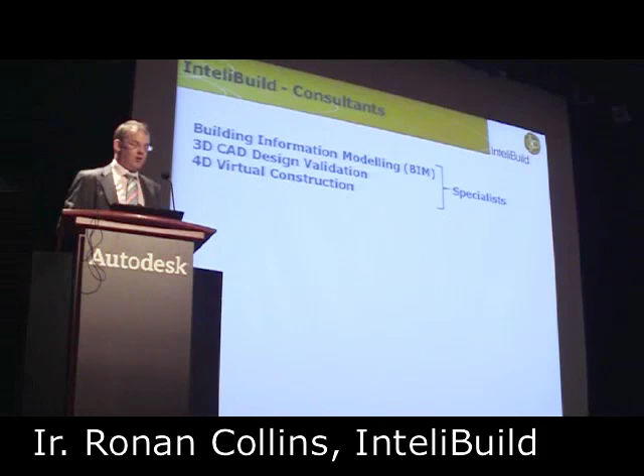My name is Ronan. I'm a chartered structural engineer and I'm the managing director of InteliBuild, and we're a specialised BIM consultancy business. We focus purely on BIM, 3D CAD and 4D virtual construction.

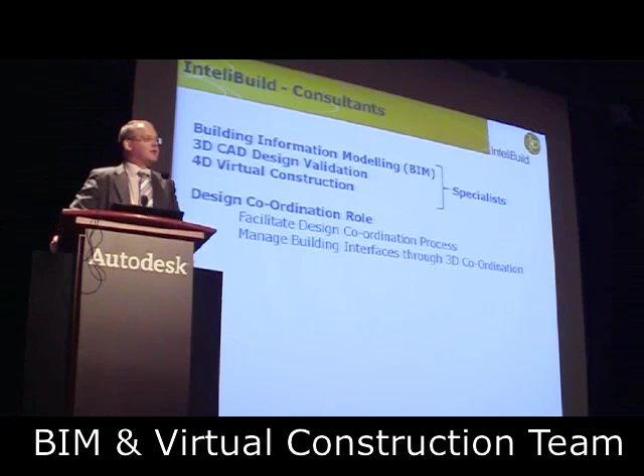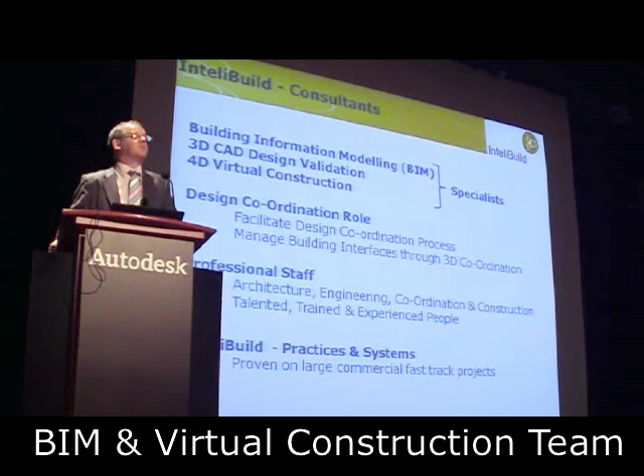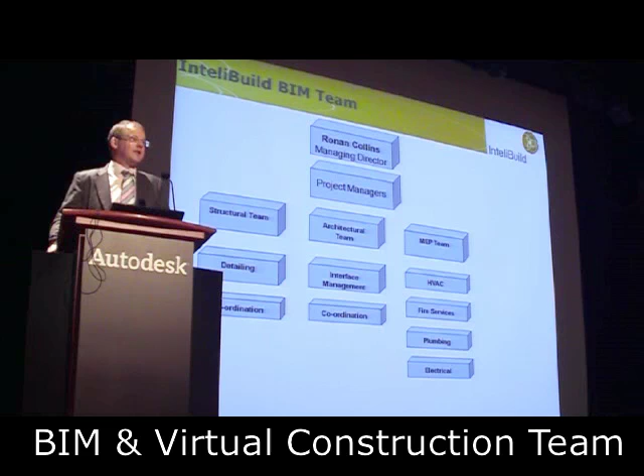We have systems and processes that we've developed over the last 6 years to do design coordination, facilitate coordination and facilitate construction planning. In our office we employ architects, structural engineers, MEP coordination staff and construction planners. We have set up project teams with structural engineers to do detailing coordination, architectural teams to manage interface management, and we have an MEP team who look after all the different disciplines. Each of the teams have specific skills and specific disciplines and are led by a project manager experienced in coordination.

So what I'm going to do today is talk about two different strategies for implementing BIM, both of which are evidenced in Hong Kong. One is a client-led design BIM process, and one is a contractor-led BIM process. If you're dealing with a large construction project and a large multidisciplinary team, there is an option to do full BIM by a full design team. And what we mean by full BIM is an architectural 3D model, structural 3D model, and MEP 3D models, all from the outset of the project.

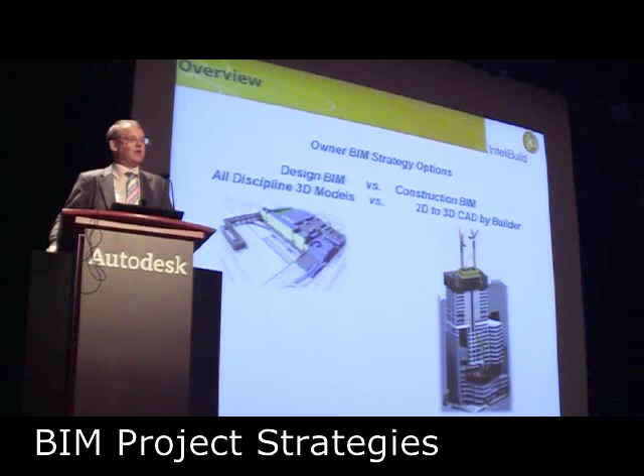On Cathay, the objectives were very clear at the outset. We had a very clear goal: to save time during the design process and the construction stage, to produce a coordinated, fully detailed design clash-free, to use the technology to produce all of the construction documentation, and to reduce the client's risk of cost variations during the contract.

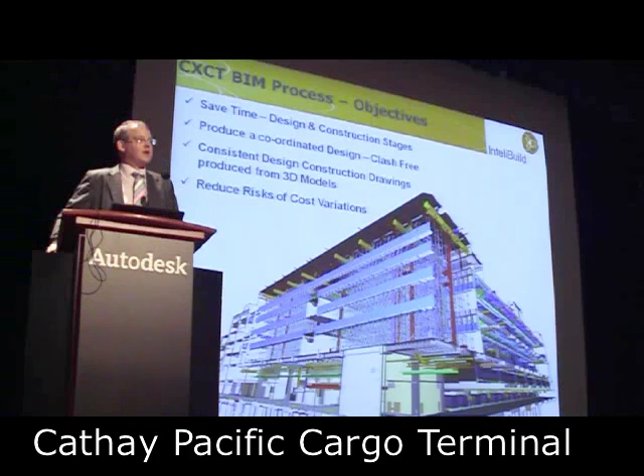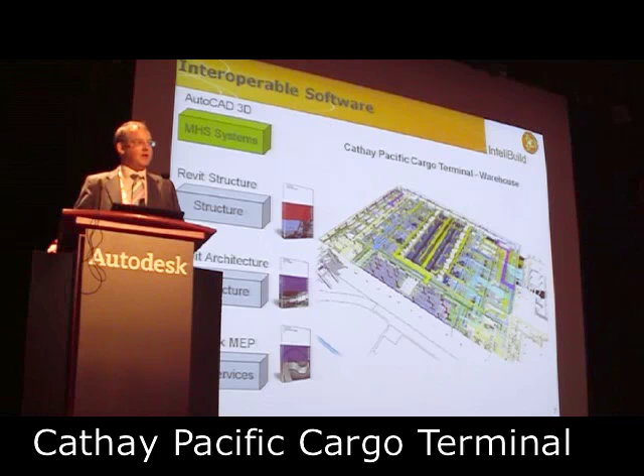The technology we used: Autodesk technology, AutoCAD for the cargo handling systems, Revit for the structure and architecture, and Autodesk MEP for all MEP systems. Each of the disciplines were working independently while coordinating the services. So there was a specific team for the HVAC, for the electrical, for the fire, and for the plumbing.

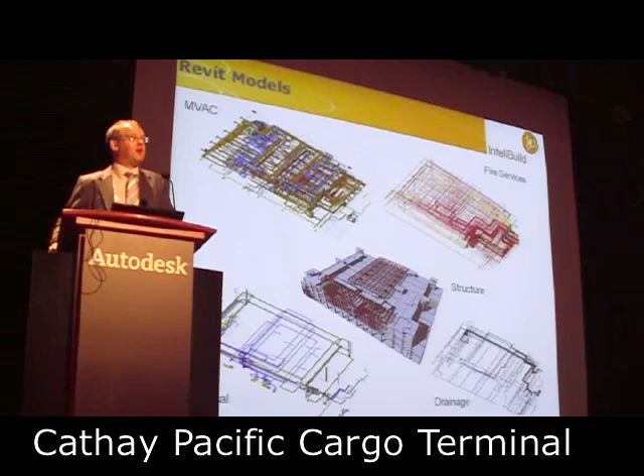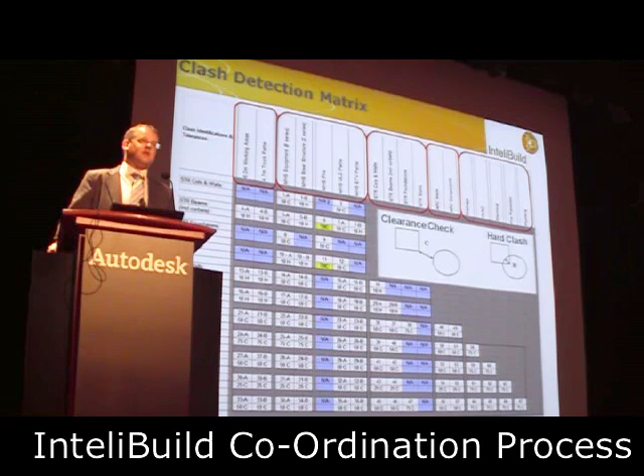Our job as the consultant was to assist in the coordination, identify coordination problems, document them, and then demonstrate those problems to designers. To do that, we've set up very sophisticated, detailed clash analysis systems. So we have a process through which we analyze the models and we determine where there are clashes, whether there are operations affected areas, whether there are architectural design issues, whether there are MEP installation issues, or whether there are actually cargo handling facility issues.

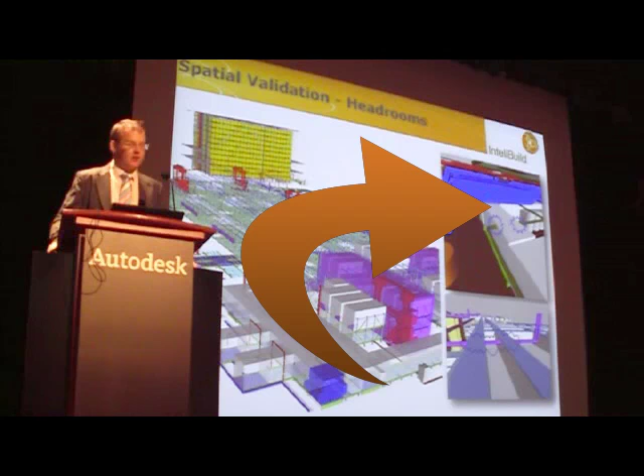To give you an example, without going into the detail, this is a part of the building. The purple block in the middle is the operating corridor for a piece of machinery that moves. So we've modelled the operating spaces as 3D objects. On the top right hand corner you'll see during the design stage we identified drainage pipes that were passing through the operations areas. So these were objects which, when you look at a 2D drawing, you would never see. We find them in the 3D clash analysis.

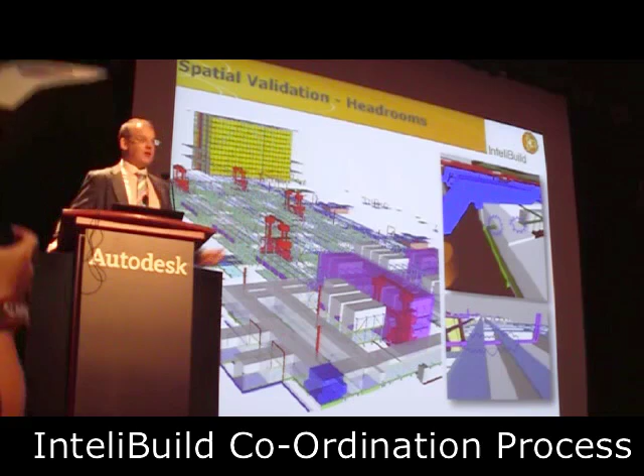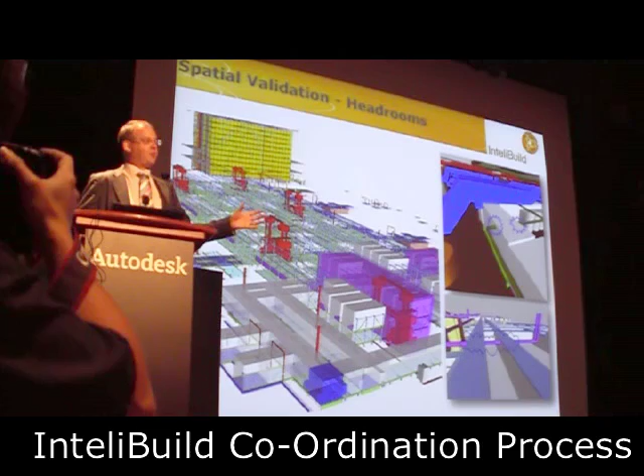As a BIM consultant, with our engineering knowledge, our coordination knowledge, we help the design teams work out solutions for these. So we advise them where to relocate the pipes, we tell them what they can move, what they cannot move, and then we help them get things sorted out. From the model, we're then producing RFIs or TQs.

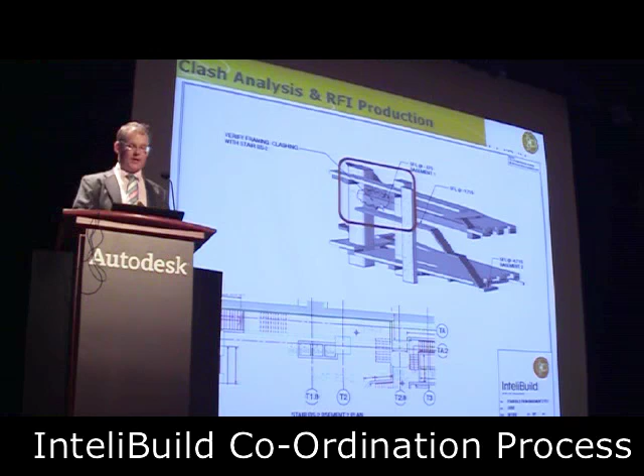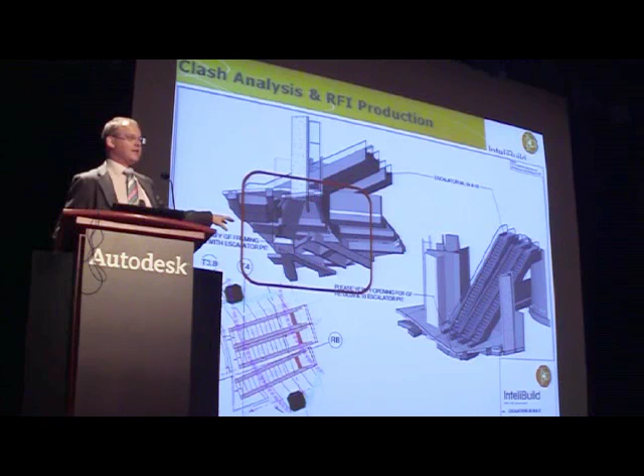In this example, we're demonstrating a clash between structural framing and stair systems. So you have 2 different design disciplines that we're trying to coordinate. In this case, we're dealing with escalators. The escalators, as you can imagine, the client is very keen to know where the escalators are, how the circulation works. So we're looking at the coordination of the escalators with the structure. So that was a design BIM led by a client.

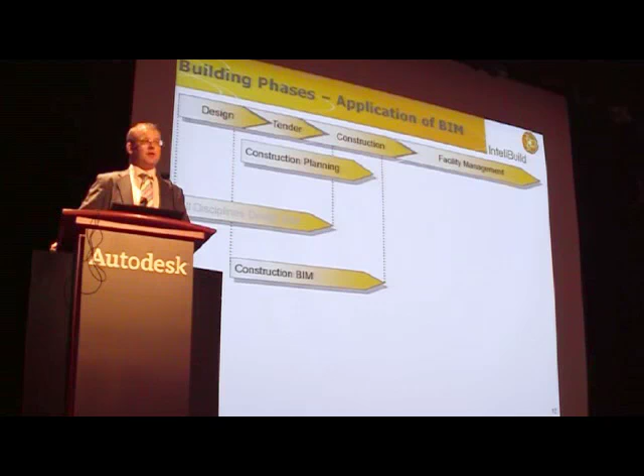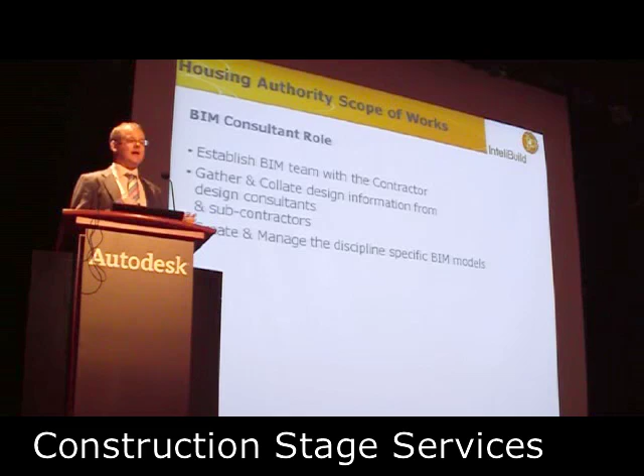Now I'm going to focus purely on construction BIM presentations. To achieve that, BIM consultants have a key role to play. They have to establish a BIM team with the contractor. This is a construction BIM model. The design team have worked predominantly in 2D, and now they're going building this thing in 3D.

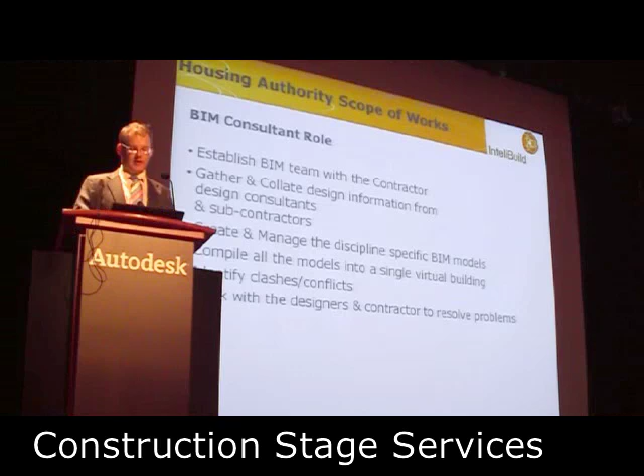The consultants have to bring together all the information, both from the design consultants and the subcontractors. They have to then manage and basically create the BIM models, identifying all the coordination issues, and then describing those to the clients, the consultant, the subcontractors, and then resolve and assist to resolve those issues.

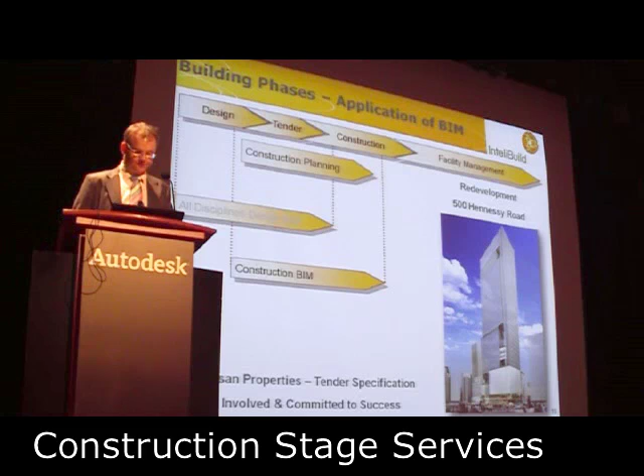Hysan are redeveloping 500 Hennessy Road. This is a very large commercial development right in the middle of Causeway Bay. We're incorporating 4D virtual construction. On this project, we're working with the design consultants' 2D documentation.

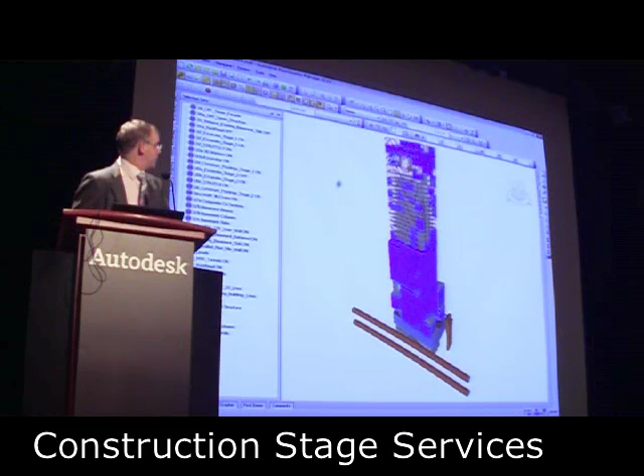We're building 3D construction models. So we're modelling the architecture, structure, all the drainage, plumbing, all the electrical systems, the MVAC systems, and we're also modeling the construction systems, temporary works, ELS.

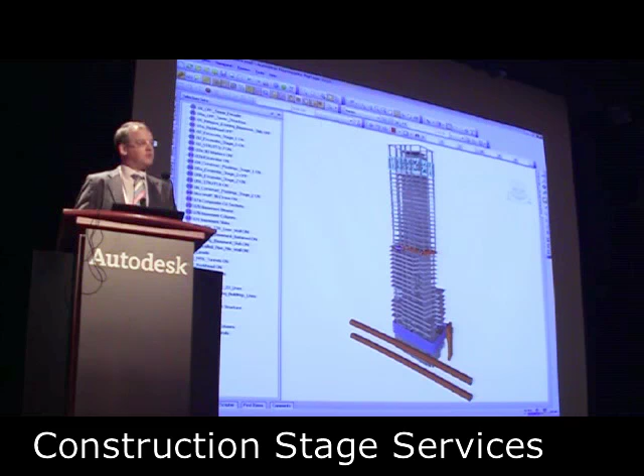So if you look at the structure, it's quite complex. There's very, very large structural steel elements at high level. There's very, very detailed and complex transfer structures throughout the building. And then you have a basement. And I'm going to focus purely on the basement to show you how we use BIM for construction planning.

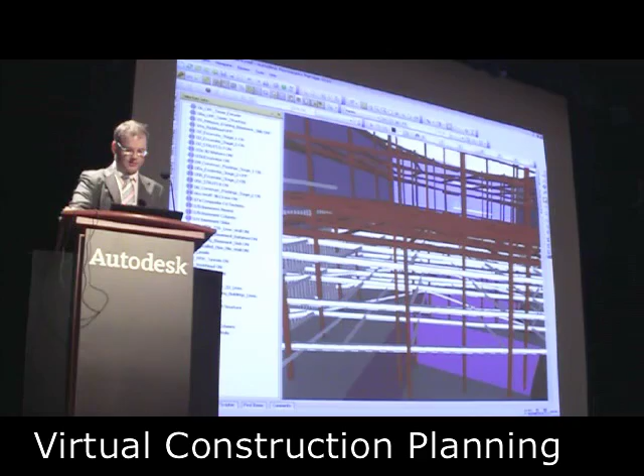So I'm not going to try and get into too much detail, but I'll just show you how we use the models. I can zoom into the building and I can look at what's happening in the hole. So I can actually position myself in the construction and see what's happening in the underground excavation. So I can look at the installation of the struts. I can get a sense of the scale by putting in some Bill and Bob figures. We have our own action men.

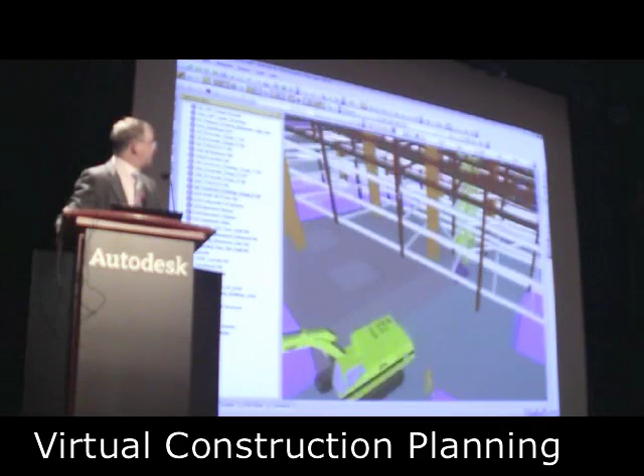So we use these models to show people what the construction is going to look like at different stages. So this is the completion of the excavation. We then move on to construct the footings and install the tower crane. So now you've got a situation where we're 6 months, 9 months down the road. We've installed the permanent columns, which are steel. We've got a tower crane on the site, and we have all the strutting.

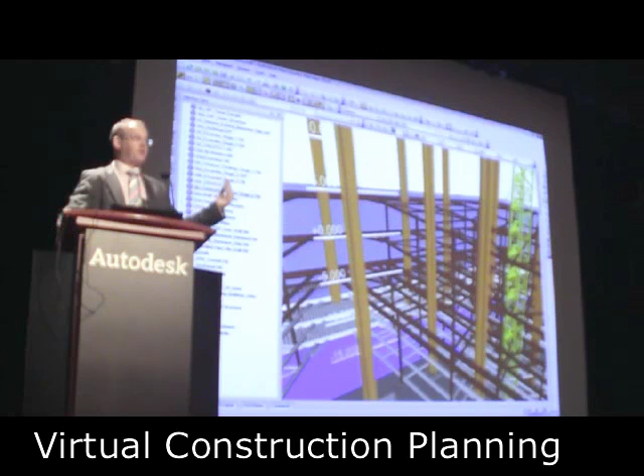All of the information in this model has been derived from government-approved drawings, structural drawings, ELS drawings. We then use the software to identify construction problems by doing clash analysis. So not only can you use clash analysis for design of ductwork and pipework and everything else, we can use it for temporary works. So I can ask the software to check temporary strutting against the composite columns, and I want to make sure I've got sufficient clearance to install the steelwork. And then I can run the analysis.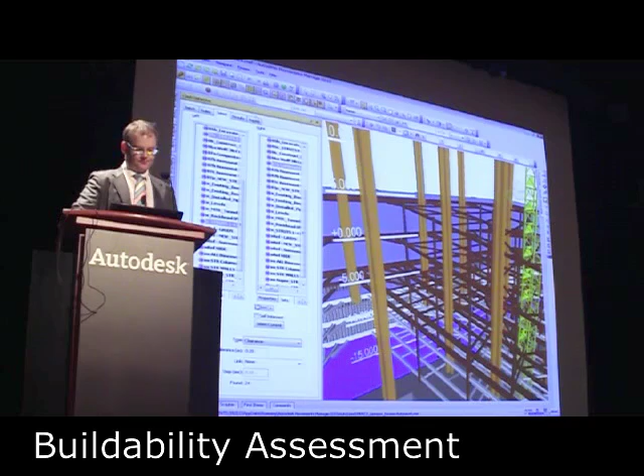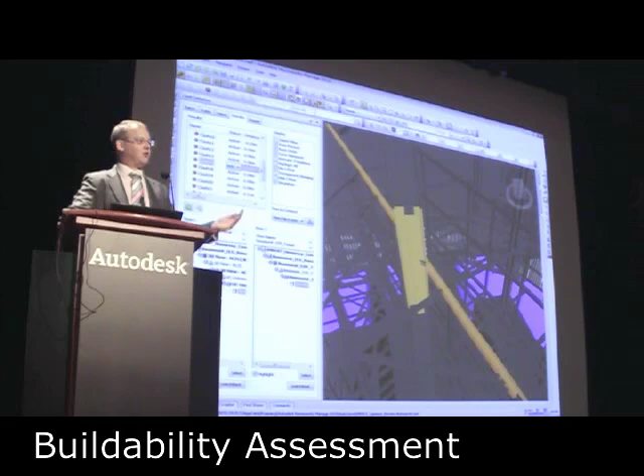It will tell me that I've got 24 coordination problems. And then it will show me where they are. So it will show me examples of where the composite sections are clashing with the permanent works. So we can actually see where we're going to have to modify the temporary works. So as we're building the building, we can actually modify the temporary works to allow for the permanent construction in the future. So this is a method of using the technology to actually plan through a construction sequence, understanding when certain things are going to be installed, what the requirements are for those different systems, etc.

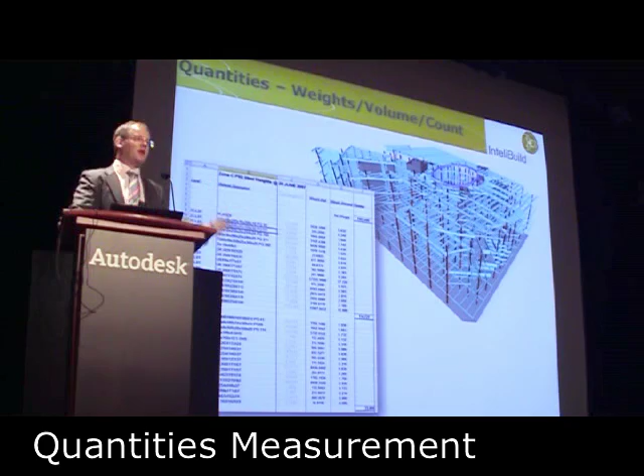And we then use it for quantities. So we've been able to quantify tons of steelwork in the ELS, volumes of concrete in the basement construction. We've also been able to understand how much muck we're taking out, how much rock we're taking out. We've looked at it in terms of the contractor's sequence of work, so we can tell the contractor month by month quantities of materials to be excavated, so they can plan their resources accordingly.

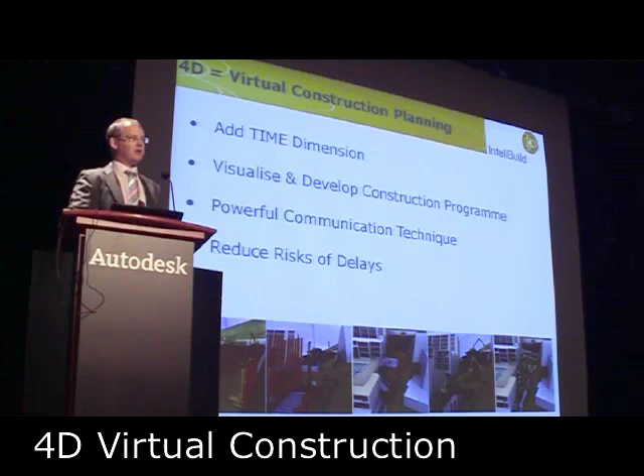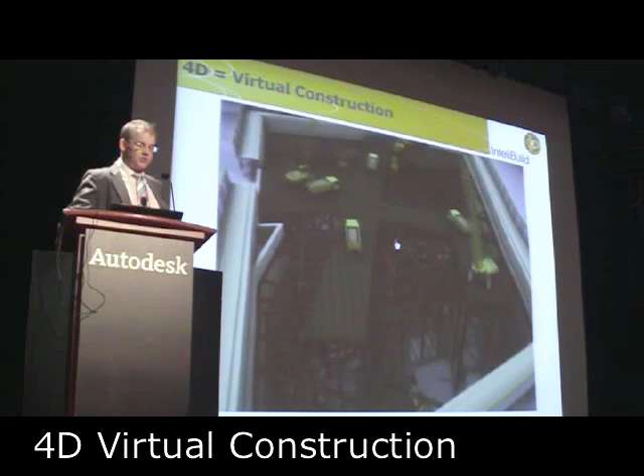Then what we've done is we've linked the contractor's program into the BIM model, so we can look at an overall construction sequence. And what we're doing is we're taking information from Primavera, we're converting it and linking it directly to the 3D Revit model, so we're able to produce a construction simulation. The first purpose of this is to demonstrate to Hysan how we're going to build the building. So how is the contractor going to complete the works? What's the construction project going to look like?

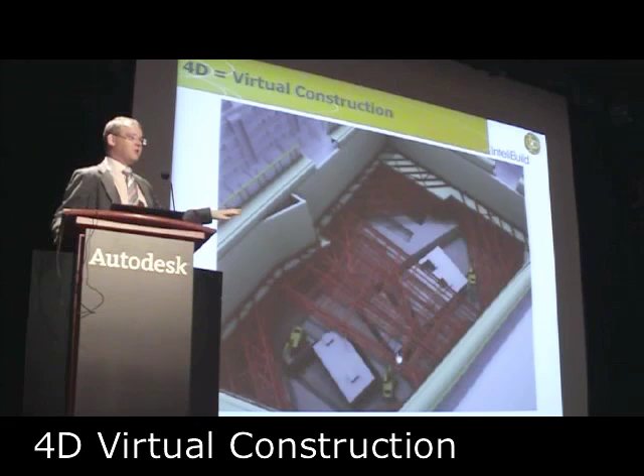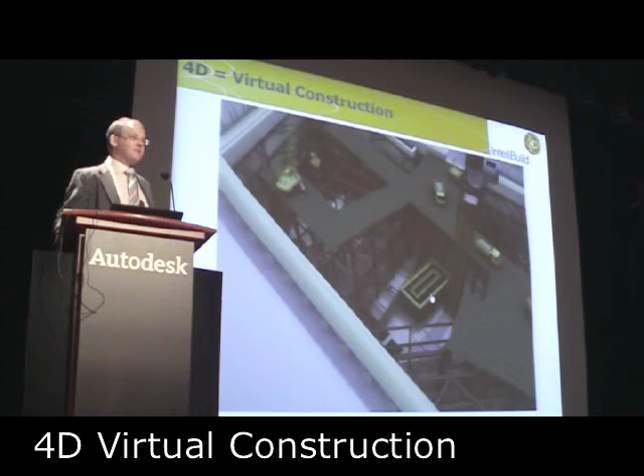So here you can see the excavation works. You can see the casting of the concrete basement structures. And this is all 12 meters, 15 meters below the street level. So this is street level. You can see how deep the hole is. And this job is on site. They're actually doing the excavation at the moment. Then we build the formwork system for the actual core walls. And then you can see the construction of the slab internally. So all the way through the process, we can use the technology to understand what's happening at different times and then plan for certain situations.

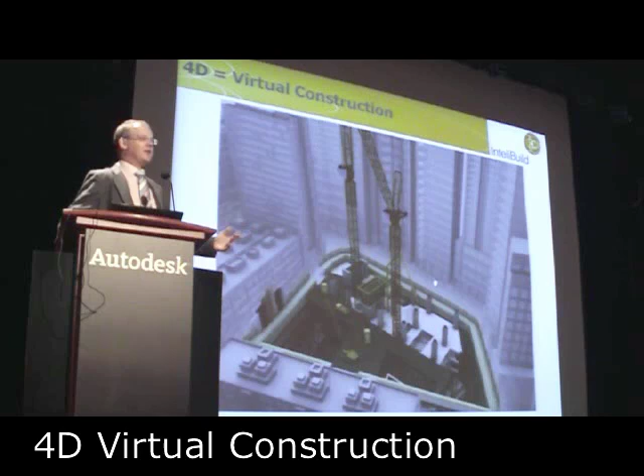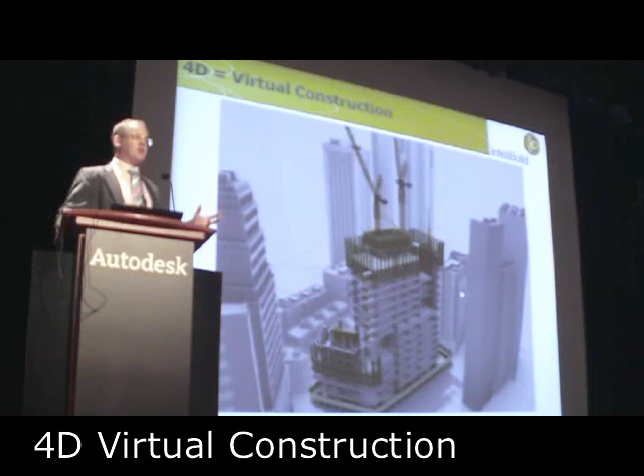And Hysan have got a very, very strong safety policy. So in all of these models, you will see safety barriers, you'll see edge of slab protection systems, you'll see different construction systems, so that all the subcontractors can understand where they're going, what they're doing, and what's happening on the job site. So this shows the construction sequence.

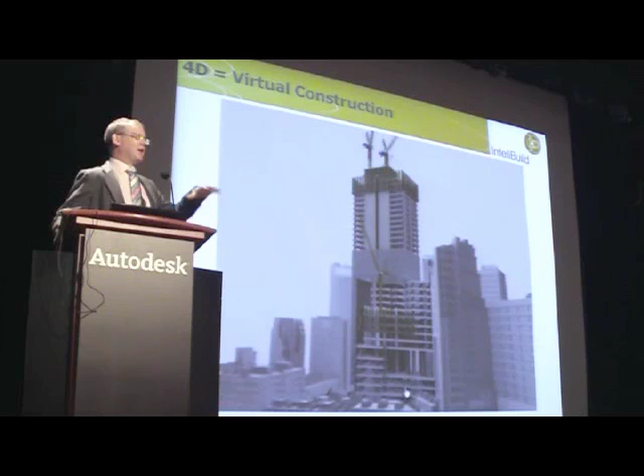So there's a number of different works areas. So there's obviously the tower, there's a retail podium, and then there's a late area for the retail podium. The reason for the late construction here is to facilitate logistics, delivery of material, and give the contractor more working space. This is the Hong Kong U Centennial campus.

We were working for Hip Hing Construction, and Hip Hing asked us to get involved with looking at purely the basement excavation sequence during the tender period. So when Hip Hing were pricing the job, we were helping to do a risk analysis, we were helping to do pricing to understand how to build a basement.

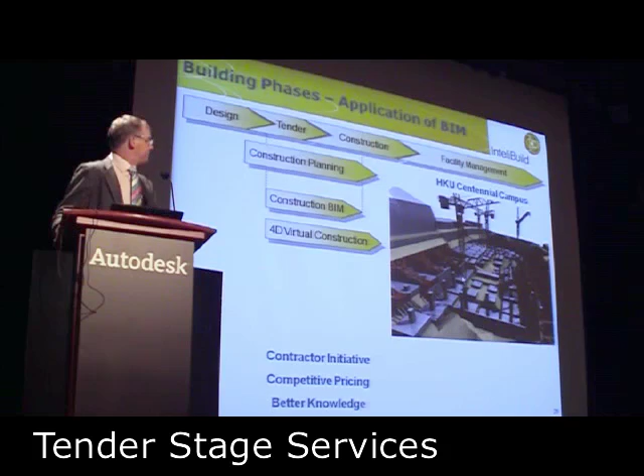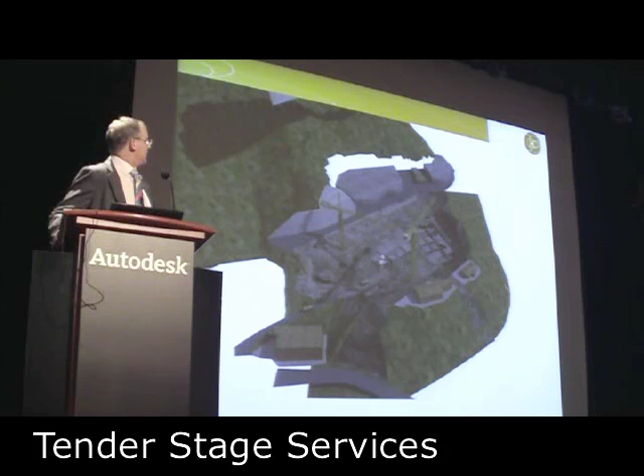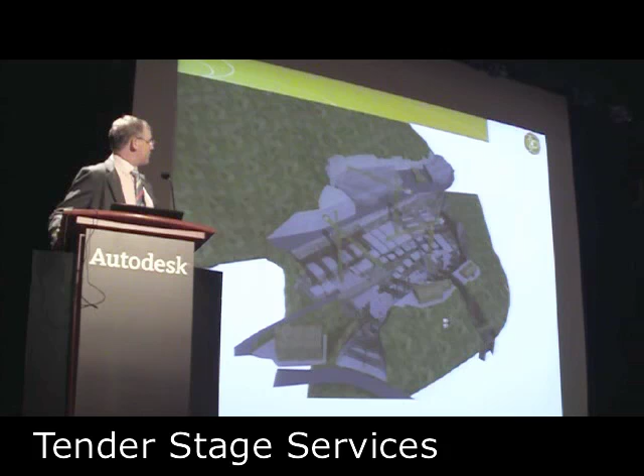What we've done is we've used the model, and again we've looked at a construction phasing. So this is basically looking at removing the reservoir, doing the excavation for the actual basement, doing the site formation, and then as you go down, installing all the ELS. So there's quite a lot of sophisticated ELS. This is the existing reservoirs, these are the two historic buildings, and the existing university is on this side. And then this shows basically the construction sequence for the floors.

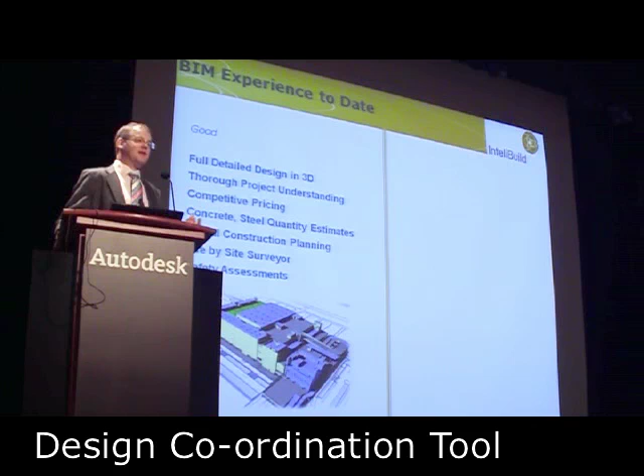The technology is very, very powerful for getting a design team to understand all the details for the coordination. So whether it's a design model where the architect, the structural engineers and mechanical engineers are all working in 3D, or whether it's an independent model that we've created, the model is a great communication tool. It allows everybody to understand the issues and everybody to see the details. That project understanding, we've seen and witnessed great improvements in design layouts, great improvements in the efficiency of getting things coordinated. So the actual understanding of a project is hugely valuable.

We've seen it being used by site surveyors. If the model is built accurately and is built to suit construction, the model can be used by the surveying team to set out the building. So they can take the 3D model, they can put it in their total stations, and they can actually lay out the building.

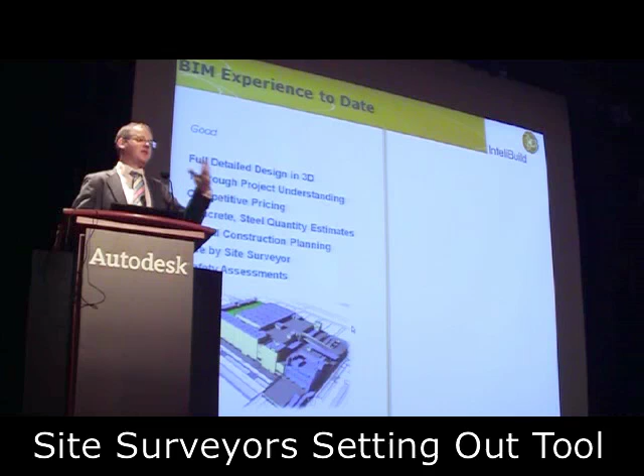And most importantly, because I'm involved with the Lighthouse Club and safety is one of our major concerns, we're now seeing the contractors use the models for safety assessments. They'll look at the 3D model, they'll look at different stages of construction, and they'll identify where protection screens are needed, they'll identify work sequences that don't look safe, and they'll help work the safety of it. So it's proving valuable from that point of view.

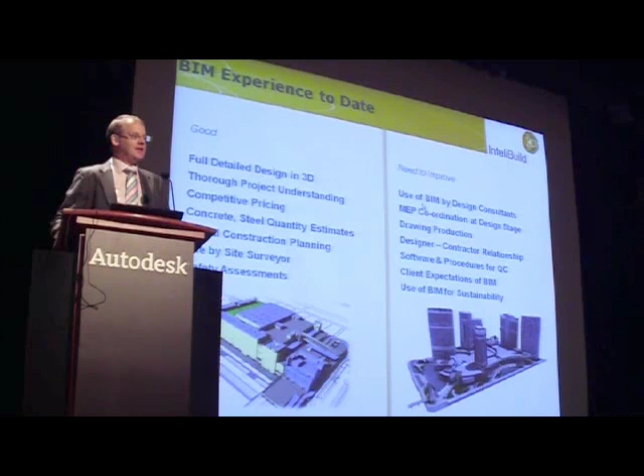We need more consultants on the design side to use BIM. The MEP consultants are the ones that are going to have to pick up the game. MEP coordination at design stage is something we don't do as an industry. We wait till the contractor's on board, and then we wait till the subcontractor's on board, and then we worry about the ductwork and pipework. In the BIM world, that's too late. So what we're having to do is we're having to bring in MEP coordination skills to the design teams and improve the coordination of MEP at the design stage.

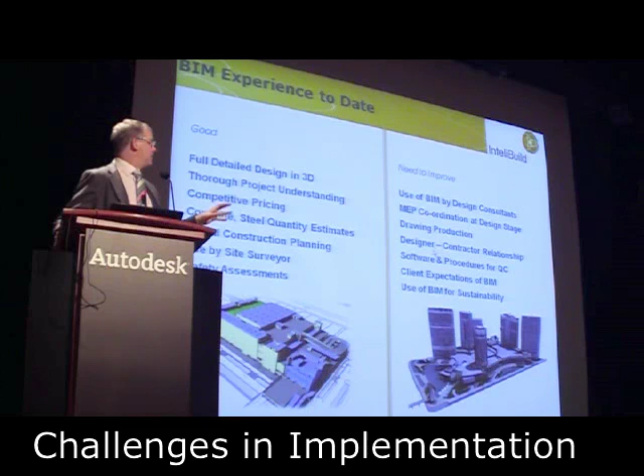My favourite is the relationship between the designers and the contractors. Because of the historic love-hate relationship between these different groups of people, we're seeing design models shelved and contractors building their own model. So we want to try and improve the setting up of BIM models at the design stage so they can be given trustingly to the contractor, and the contractor can build from those models. Because at the moment we're finding a lot of people building design models and then contractors having to build a completely new model for the construction.

To make BIM successful, it needs to have the full support of the owner. So you can have an architectural 3D model, fantastic, but if you really want to get the full benefit of BIM, you have to get the owner involved.

My personal favourite, you need to get construction advice into the design team as early as possible on these major projects. There's too many things that can go wrong, there's too many options available for saving money. The sooner you can get pre-construction advice to a large design team, the better. And we're seeing that now in Hong Kong. The MTR are very good at it, some of the clients are good at it, so we're seeing it more and more commonly.

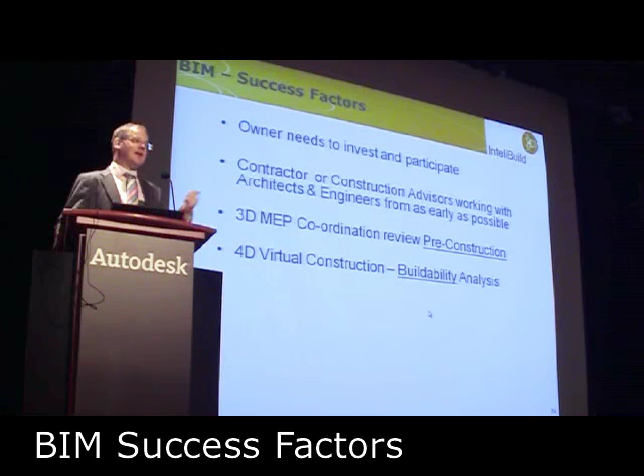We need to improve 3D MEP coordination during the design stage. And we need to make more use of these virtual construction systems. We need to make more use of buildability assessments to make sure that we're actually designing a building that's A, safe to build, and B, efficient.

And I've gone over time.

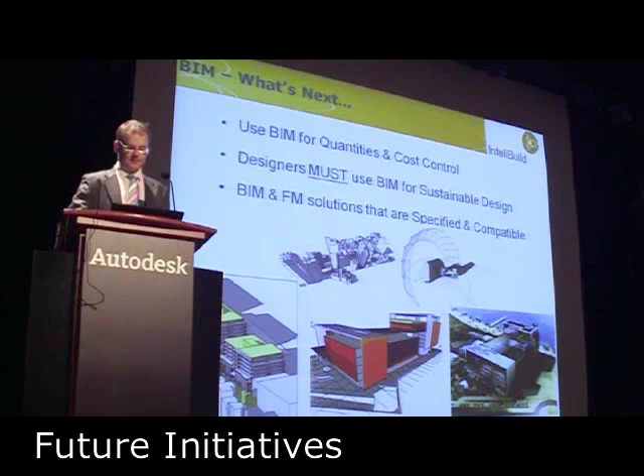And then to finish up, my 3 requests, if there's anybody here with a genie in a bottle: we need to make more use of BIM for quantities, we need to get the designers to use BIM for sustainable design, and we need to look specifically at facility management solutions. There is no solution in the marketplace that I can take a BIM model through to facility management. There are tools that people are developing, but it's not there yet. So my 3 wishes: quantities, sustainability, and facility management.